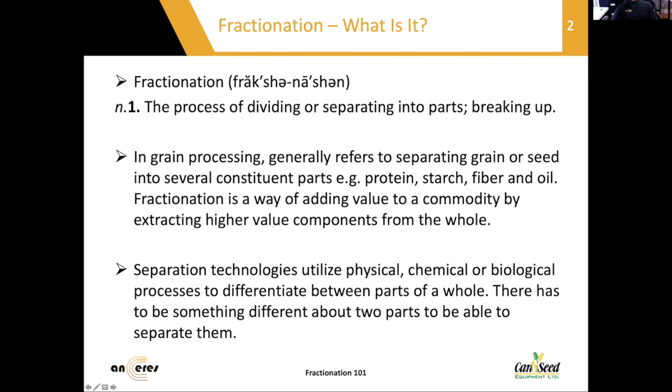Separation technologies utilize physical, chemical, or biological processes to differentiate between those parts. There has to be something different about two parts in order to be able to separate them. So I wanted to start by talking a little bit about what makes up seeds and how they're composed.

So that we can understand what's necessary to take them apart and get these components we're interested in. This slide shows a number of different Western Canadian commodities that end up being processed through fractionation in one way or another. I think everybody today thinks of fractionation perhaps in terms of protein extraction, but even things like wheat flour milling is a fractionation process to some extent, and canola oil crushing is a fractionation process where we're extracting the oil.

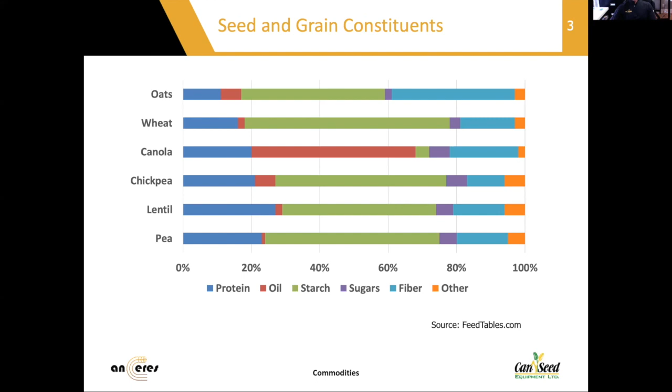So you can see that most of these commodities here, there's a lot of big green bar there - that's the starch component. Canola obviously doesn't have hardly any starch in it, but it has a lot of oil. So there's, as I mentioned, four big pieces. There's also some sugars and other components in there, but we're primarily talking about these four big components.

So common fractionation technologies rely on differences in things like size, density, solubility, electrical charge, and digestibility - all these different characteristics of those components - in order to separate them.

In general terms, when we're talking about wet fractionation versus dry, there's two primary ways we can think about fractionation. Wet fractionation usually involves aqueous, water-based separation, and we're making the separation down at the molecular level - the size of that is called an angstrom, which is very, very tiny, like one tenth billionth of a meter. Whereas dry fractionation is typically happening at a much larger scale.

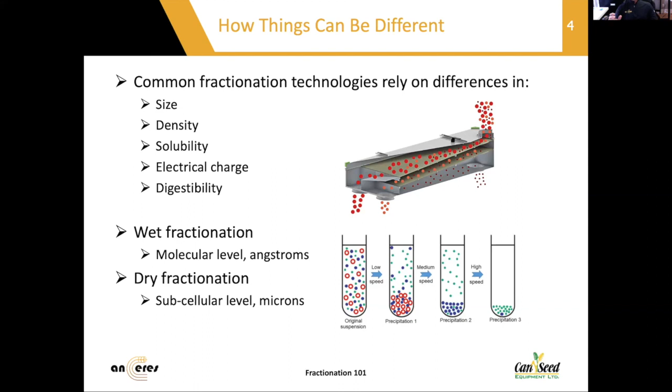It's on the level of essentially the sub-cellular level of the plant, so you're taking those individual cells and just breaking them up a little bit. We want to talk for a minute about what those main components are that I mentioned on the previous slide, and some of the key characteristics that help us use technologies to get them apart.

Proteins, which you heard a lot about if you were on the webinar last week, are basically built from amino acids and are relatively large molecules. There's a whole bunch of amino acids strung together in a chain, and then that chain ends up getting folded and pleated, and you end up with this sort of clumpy protein particle.

It has a positive or negative charge and will move in an electric field, so that is one way that we can sometimes separate them. Another characteristic of proteins is that they have what's referred to as an isoelectric point.

So you can put proteins into a solution, into a solvent like water, and at a certain point they will be soluble, and at a certain other pH level they will not be soluble and they will precipitate out. Again, that's another technology that can be used to separate them.

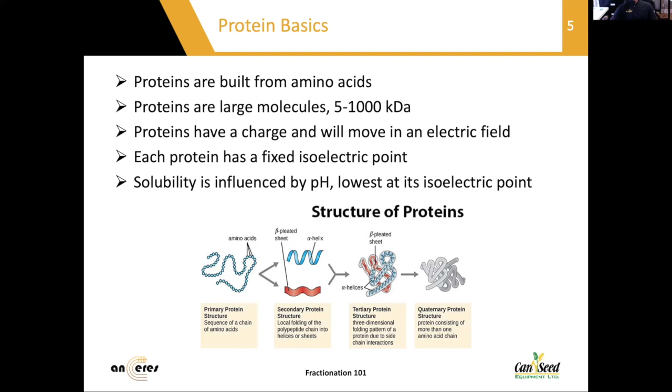Carbohydrates, which are made up of simple sugar molecules stuck together in a different order, include sugars, starches, and fiber - big classes of carbohydrates. That includes all three of those mentioned in the breakout slide for the different commodities.

A couple of key differences among some of these are that starches generally can be dissolved in water, and cellulose, which is a fiber, does not. So we can start to separate these out again because of how soluble they are.

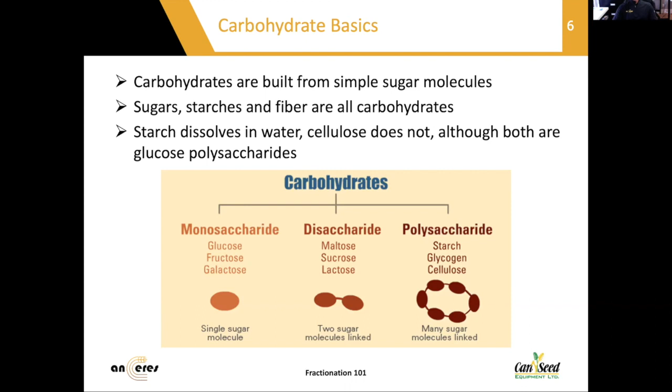And then fats are built from fatty acids. On the left-hand side there, you can see what's referred to as a triglyceride, so 3 fatty acid molecules joined together. A couple of key characteristics are that they are less dense than water, so they'll float.

The photo on the right is something you might see in your kitchen where you have, say, chicken stock, and if you let it sit, that fat will float to the top, and the solution below that, which has a lot of proteins in it, as it cools off, becomes like a gel. So it's temperature dependent, and it's also density dependent, allowing us to make separations there.

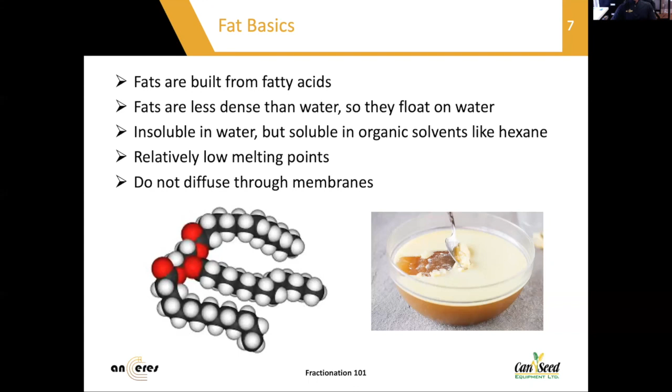Fats are soluble in organic solvents like hexane. So if you go to a canola crush plant, that's one of the methods used to separate the oil out of the canola from the meal, which is made up of protein and fiber mostly. They put that oil into solution in the hexane and then remove that and separate the hexane from the oil.

Okay, let's take a look at how seeds are basically composed, whether they are oil seeds like canola or soy, or starchy seeds like wheat, barley, or legumes. They generally have similar characteristics.

There's a seed coat around the outside, mostly made up of carbohydrates and fiber. Inside, there's a whole bunch of cells storing energy molecules: starches, fats, and proteins. So with dry fractionation, we're taking these seeds and breaking them up to the point that we can start to differentiate these starch, oil, and protein particles from one another, while they're still in relatively large clumps. Whereas in wet fractionation, we're breaking this all the way down to the molecules.

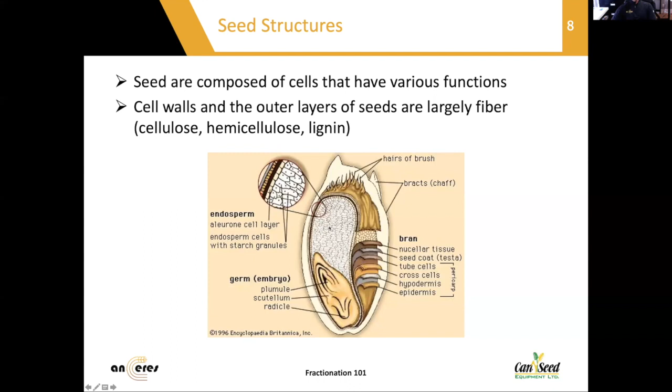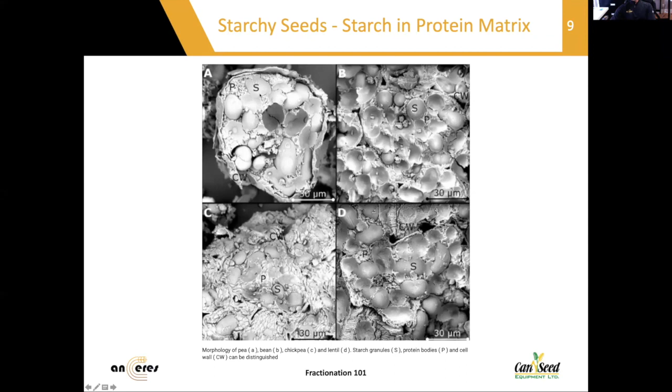If we look at an oil seed, it's very similar - it's got this cell wall around the outside, which again is made of fiber. Inside we have protein bodies and oil bodies, and they're very similar in size in the oil seeds, again sort of in this 2 micron range.

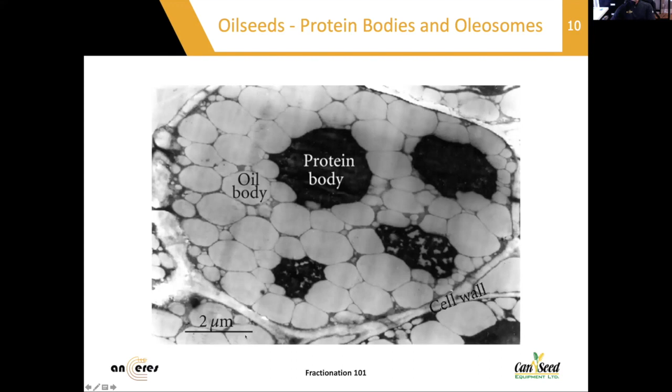So I've mentioned that we have wet fractionation and dry fractionation. Here's a high-level process flow. If you have starch-rich legumes, like lentils and peas, that don't have any oil in them, generally in a wet process we would go through the left-hand side here. We grind it down, put it into water, and then use hydrocyclones - I'll show you a photo of those. Basically, we're separating with very high rotational speed, creating a lot of centrifugal force, and just taking the larger particles out from the smaller particles.

Then, based on some of those things I mentioned about proteins, that we can put them into solution depending on the pH, we go through that process of solubilizing them and then precipitating them, and ultimately drying them to get the protein isolate we're interested in. On the oil-rich legumes, you have to take the oil out first because it interferes with a lot of the rest of the separation process, but then the last part of it is similar.

And as I mentioned with the dry fractionation, we're basically milling it down, and then a common approach is to use air classification, which allows us to separate those starch granules from the protein bodies on the basis of how large they are.

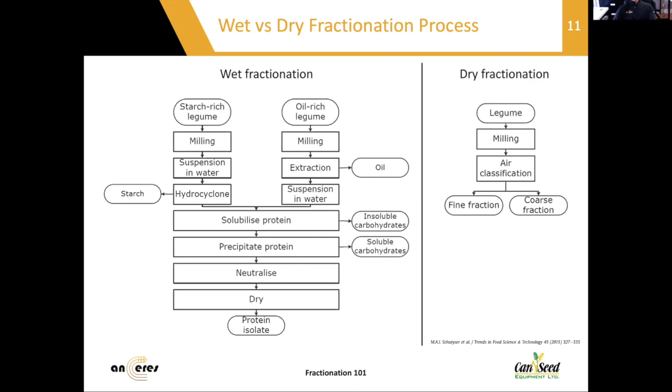So some of the key aspects that are different between wet and dry fractionation: the particle size we're talking about is at the molecular level in wet fractionation, and at the micron level, close to the cell size, for dry.

With regard to the purity of the fractions, by doing wet fractionation you can produce what are referred to as isolates - very high concentration, like 85% or more pure protein. In dry fractionation, you're only able to concentrate it up to about 50% protein, on the order of magnitude. We obviously use a lot more water in wet fractionation, and a lot more energy, because we then have to dry it down once the extraction is completed.

There's also a fair bit of chemical use common in wet fractionation, because we're trying to manage pH by adding acids or bases. Some protein extraction also requires high salt content, so there may be a lot of chemicals added in the wet fractionation process, and that doesn't happen in dry fractionation.

You may be familiar with protein denaturation. If you cook an egg, you break it onto a hot surface and the white solidifies - you can see it changes. What's happening is those proteins are being changed by the heat. Heat or chemical reactions can cause proteins, which are normally folded up, to change in structure. That happens more commonly in wet fractionation, and we need to be careful because it might mean the proteins you're getting out are no longer as functional as you'd want.

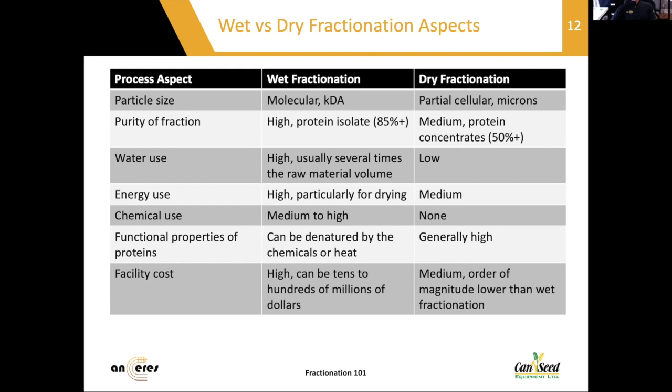Before I turn this over to Chance to talk about dry fractionation technologies, I'll show a few examples of equipment and technologies on the wet side. In the front end of the plant, preparing the material before fractionation is very similar between wet and dry - Chance will talk about those. Then on the wet side we start with grinding and slurry dispersion, using equipment such as this blue grinder here.

We have things like centrifugal sieves up on the top right here, where you're pumping a slurry in. Because fibers don't break up very easily, they stay larger, and the proteins and starches go through the sieve while the fiber gets removed. So that's one way of separating things.

Decanter centrifuges and disc stack centrifuges are somewhat similar technologies, using very high rotational speeds to separate slurries and get dry matter out of wet, or to separate high and low density slurries.

You've probably heard of ultrafiltration - that's the use of membranes. You've got these very large pieces of equipment where you're passing water through, and the very small molecules go through a membrane. It's sort of like a sieve, but much smaller, and the large particles stay on the other side. You're creating a lot of high pressure and using a lot of horsepower to do that.

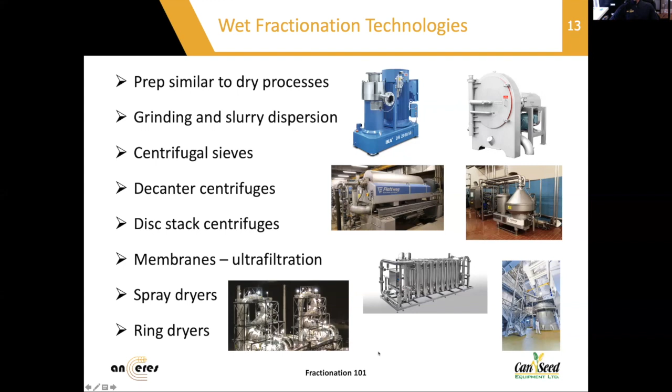So Chance, I'll turn this over to you now, and you can go ahead and talk about the dry side.

Everyone hear me? Yeah, yep. Yes, we can hear you.

Okay, thank you, Trevor. So I will go through a really brief, broad overview of some equipment necessary on the dry fractionation side. Something I want to cover quickly is the potential need on the front end for pre-cleaning. This is a relatively more basic part of the operation, but an important one. I'll talk about it at the end of the presentation a little bit. It may be worthwhile for an owner to use a third-party resource for this, but I do want to touch on it briefly.

So for your raw material coming in, if you have needs for pre-cleaning, you want to use some type of rough cleaning, whether that be a drum cleaner or air aspiration. Your primary purpose here is to reduce chaff and pods in the material, and your secondary purpose is to remove foreign seed from the primary seed you're trying to put through your process. Other than that, there's not much else to it, so we'll move on to the next one.

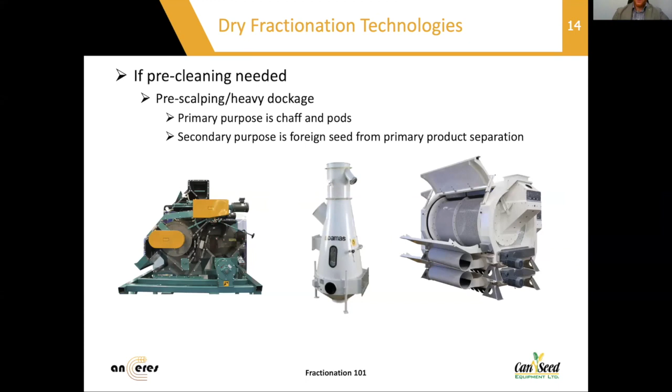Further pre-cleaning here, air screen machines, rotary drum sieves, depending on the application. This is typically more used in fine cleaning and grading. Your primary purpose here is to do a closer separation of like from similar.

And what I mean by like from similar is anyone who is a front-end agricultural producer knows you always get some type of cross-contamination of your fields, even if you're a pedigreed seed grower. So this could be cereals in your peas or vice versa, or foreign cereals in your cereals, or foreign pulses in your pulses. So what you're trying to do here is just reduce your foreign material.

So let's say we're processing field peas in our dry fractionation process, and we have some wild oats and/or barley that's 0.05 or 0.5%. To mechanical machinery, those products can look really similar. To our naked eye as a human, they look very different. And that's what I mean by like from similar. Size and length of a pea compared to an oat can actually be quite similar, but it's a very different product. Your secondary purpose here with your fine cleaning and grading is to separate like from like.

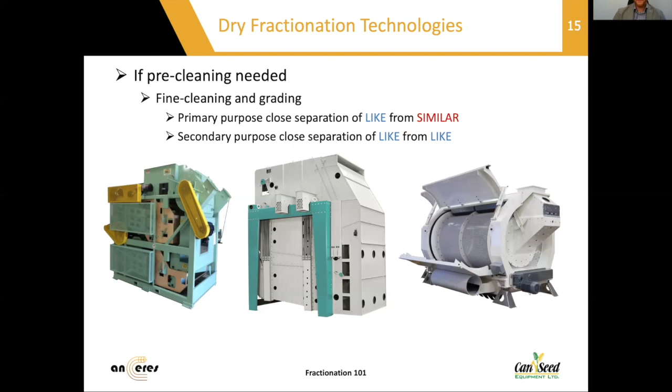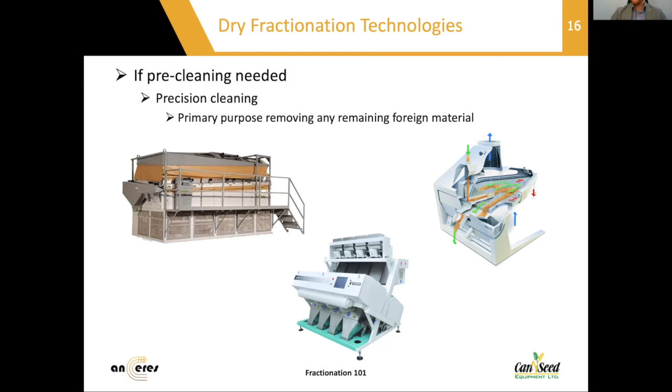Final step of your pre-cleaning, more specialized equipment like your gravity tables, your destoners, your color sorters, and your primary purpose here is removing any remaining foreign material. So going into the fractionation process, you have some more expensive equipment that I'll talk about in a minute. You don't want any stones, you don't want any foreign material going into it. Number one, from a purity perspective, but also number two, from an equipment integrity perspective. That can be very damaging on your process, and downtime in your process can be very costly as well.

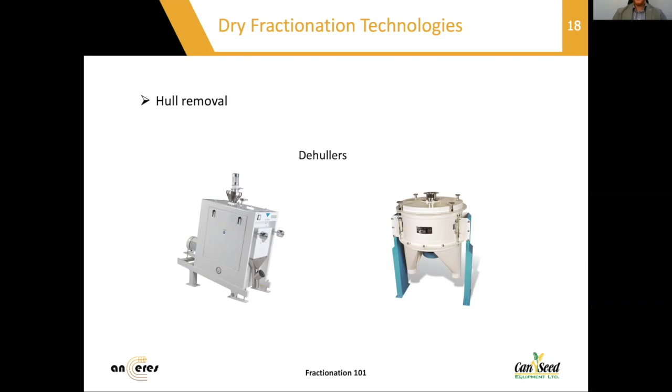So your first step in your fractionation process is your dehulling. Relatively inexpensive, simple technologies. However, the proper technology should be used here. The more appropriate technology would be the one on the left, which would be an emery stone mill type application. There are some people using impact mills, which would be the one on the right. And your primary purpose here is to remove that outer cell wall to give access to the seed and basically just make your fractionation process a little bit more efficient. Relatively inexpensive again, simple to integrate into your process.

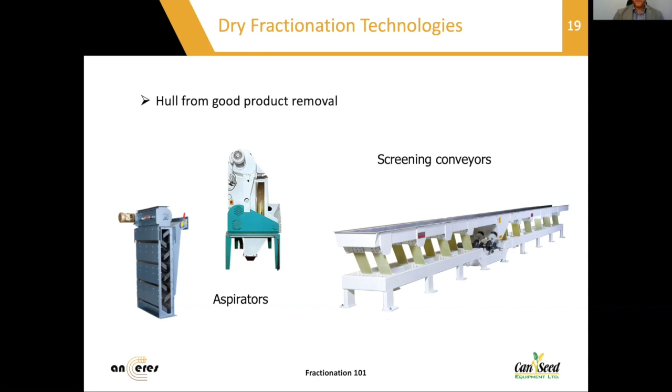Again, relatively inexpensive, but depending on the tonnage that you're trying to put through your mill and or your layout, each of them have their own applications. On a per unit cost, definitely the right-hand vibrating conveyor is much more expensive than the two options on the left. So what we see most often would be a cascade or multi-pass aspirator that you see there. So that's the front end of the process there, which you see again on that left side of the process flow.

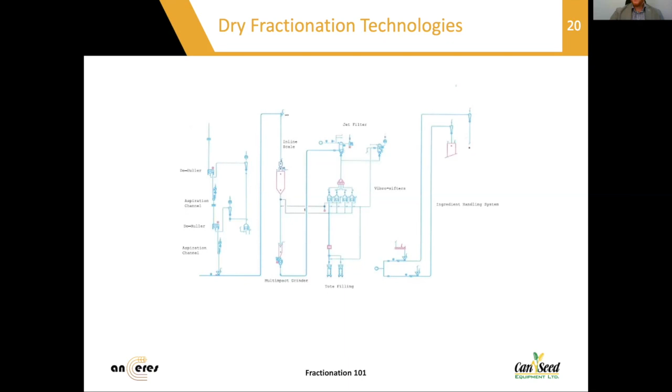What we're going to do now is move into the actual fractionation side of the process, which is the middle portion that you see in the middle of the screen with your scaling, your grinding, and your fractionation. So the first part of this process is not 100% necessary for output, but as Trevor spoke about earlier in terms of the level of investment that you're making, whether it be for dry or wet fractionation, we're talking many, many tens of millions of dollars for any significant tonnage. At that level of production and level of capital cost input, you're really, really trying to manage on fractions of percentage points what your input and output are.

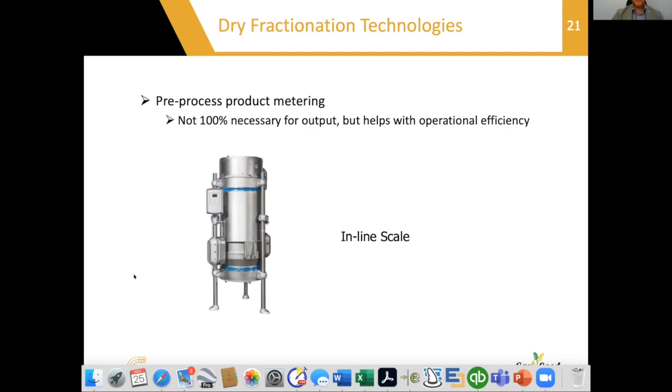One of the ways that you can do that is inline scaling, either coming into process, in process, or after process. Again, this is not 100% necessary, but relative to the cost of an entire project, this is really a management tool that makes it easier for you to measure that shrink that you're incurring in your process, and just allows you to eke out those little small gains that you want over time that are incremental and really necessary to drive margin in your business. Sorry. So first part here is your kind of unique scenario that I mentioned previously.

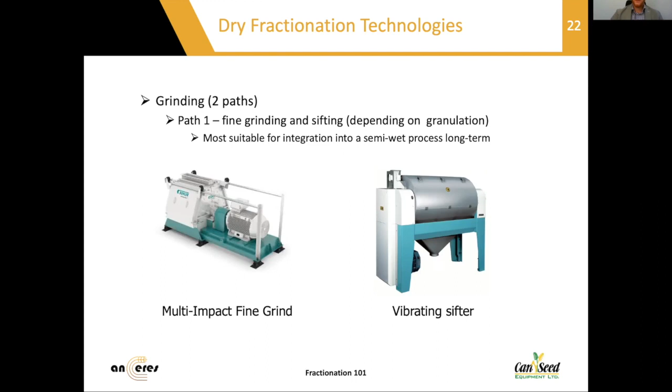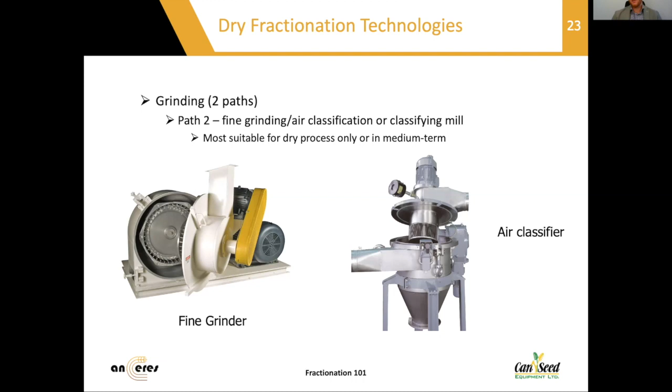Anybody who's been to ag trade shows in the last couple of years, there are some kind of on-farm, not nearly as efficient or capable of making fractionation cuts to this level, type machines from someone like Lemon that would sell this type of material. But the basic technology is exactly the same. You're using an air column, you're floating this fine ground material through that air column, and certain particles will fly farther than another. And that's how you're sorting your classes of products into their different classes, your protein, your starch, your fiber.

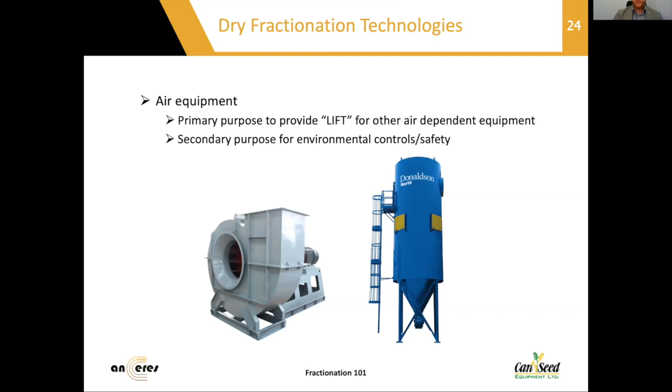And last but not least, I want to just have a really brief overview. I touched on it at the beginning when I started there. There are strategies that you can take to break up this process in order to reduce capital, reduce amount of real estate that you need to produce a mill, whether it is dry or wet fractionation, or just focus on your process that you're good at and have someone else that you partner with that helps you with another part of it.

So you have to ask yourself, are you going to handle the entire process, or will you partner with third-party organizations? In our experience, it's more than likely that if you do partner with a third-party organization, it will be for that preconditioning stage. There's a number of third-party cleaners that are willing to do this type of work in the marketplace, and it's a relatively inexpensive endeavor. Your one exception of that in a more advanced stage would be a co-packing agreement.

So you would create the primary product, which would be a dry fractionated product, possibly put it in mini bulk bags or bulk truck it to a third party location, and then have them put that into a different size bagging type operation. This is typically a shorter term strategy. And based on the amount of money that you're spending, this is typically something in the short, medium term that's very rapidly brought in-house.